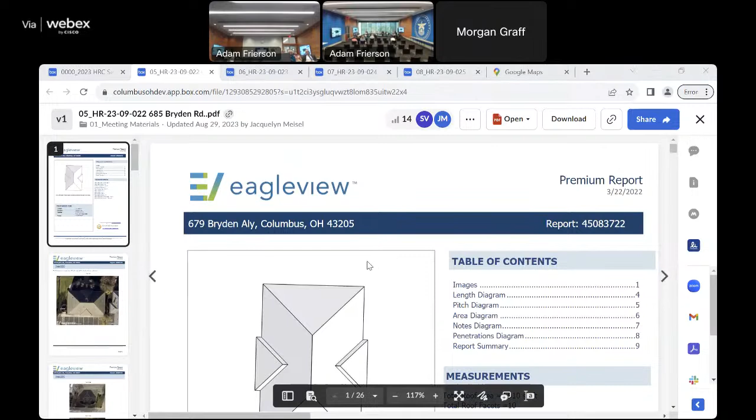This is a request for action, exterior alteration. The proposal is to replace asphalt shingles with CertainTeed Landmark Architectural Dimensional shingles in Noir Black. That shingle is not from the approved list, which is why the application is on the agenda. It would also include installing a gray metal ridge roll.

The application was previously on the November 2022 HRC agenda, but it was withdrawn by the applicant at that time, so the applicant has resubmitted. The building at 685 Bryden Road was approved as new construction in 1991. The construction drawings note the roofing material as 30-year asphalt shingles with 2 skylights on the west slope of the roof and 1 skylight on the north.

Based on review of building permits, it appears that the existing 3-tab shingle currently installed is likely the original shingle. The landmark shingles proposed are described by the manufacturer CertainTeed as designed to replicate the appearance of cedar-shake roofing. There are currently 5 different landmark designs, which are listed out in the staff report.

In historic districts, the commission focuses on what materials were originally used on buildings, and we try to maintain those original materials, or return to the original materials if the building has been modified over the years. So City Code 316.11, standards for alteration, requires that new materials match the original as closely as possible.

Previously, maybe not for this application but for the prior one, the applicant mentioned they weren't sure if some of the shingles on the approved list were available. So we checked in November of last year and also recently this month, just to make sure at least a few of them were available.

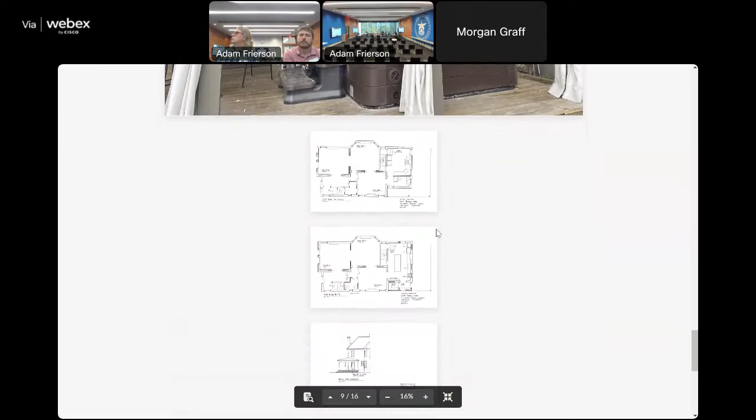A new window, aluminum wood, as well as a new door that would be a full light smooth fiberglass door with a transom. The new siding would be smooth cement board lap siding with smooth cement board trim. The proposal also includes replacing the existing back door with a new 4-panel smooth fiberglass door and replacing the existing window with a new full light door with a transom under the existing porch.

A full width rear porch was present historically by 1921, but this was removed by the 1990s. The current rear porch existing now was constructed sometime between 2016 and 2017, at least per the county auditor inventory. We're not able to find a record of it to confirm in our files.

At the September 7th business meeting, the commissioners asked for clarification about the site plan, noting that a section of the porch appeared to be left off. The commissioners requested a side-by-side view of the elevations and photos to clarify the proposed changes, and asked if the door opening that will be removed is an original door opening, noting that removal of the original door opening was the main concern.

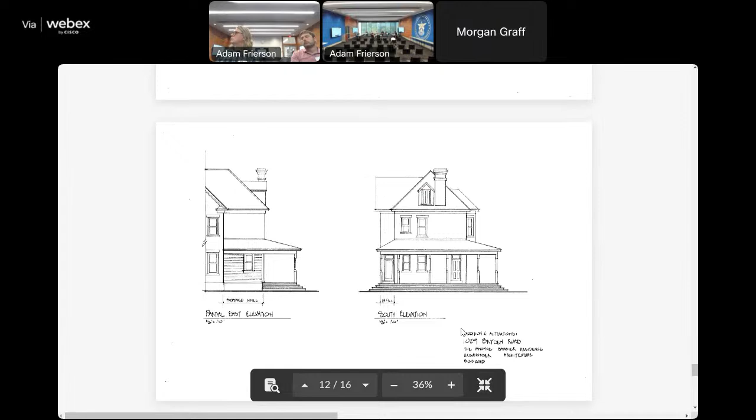In response to commission feedback, the applicant noted that the area of the porch where no changes were proposed was left off in order to better fit the area where changes are proposed. The applicant noted that photo 3 shows the west elevation, probably the best photo to compare, showing where the railing is, which is proposed to be a solid wall.

Photos 3 and 4 show the south elevation, and photo 6 shows the non-original door proposed to be replaced with a new 4-panel solid door. Photos 7 and 8 show an existing window over the hot tub, which would be replaced with a full light door and transom, like the east elevation.

The applicant also noted that the only change would be that they wouldn't be replacing the interior door opening, so they would be removing that access from the inside, and replacing the non-original door with a solid 4-panel door.

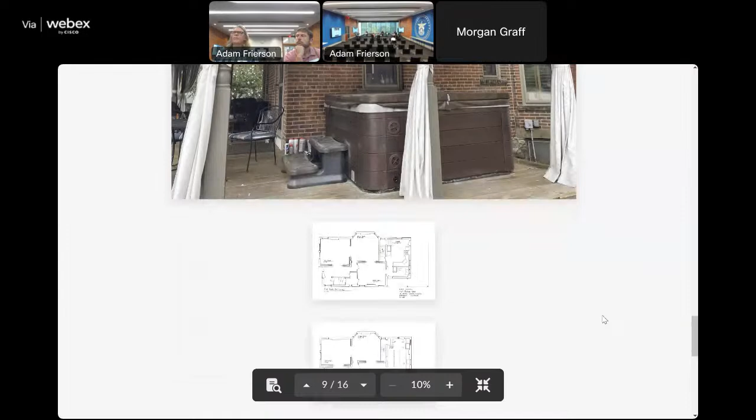This is a conceptual application, so the recommendation is that the commission should offer design feedback that can be utilized by the applicant to further refine the proposal for review at a future HRC meeting. No action is required. The basis for the staff recommendation are the standards for alteration, specifically numbers 1, 2, 10, and 12, as well as the standards for new construction under City Code 316.12.

I'll turn it back over to the commission. Thank you, does the applicant have anything they'd like to add? Basically what we want to do is create this mudroom and pantry and a new entrance. The idea would be that we build from the header down, put a new foundation in, and just enclose part of this non-original porch.

At the same time, we've got that Dutch door on the back that we would wall over from the inside and put a new 4-panel solid door on the outside. And we would like to add another door where that window is.

I think we have sort of 3 things to talk about and see how comfortable the commission is with those proposals. But the roof of the porch would all stay, it's the existing roof line. It's essentially just replacing from the gutter line down.

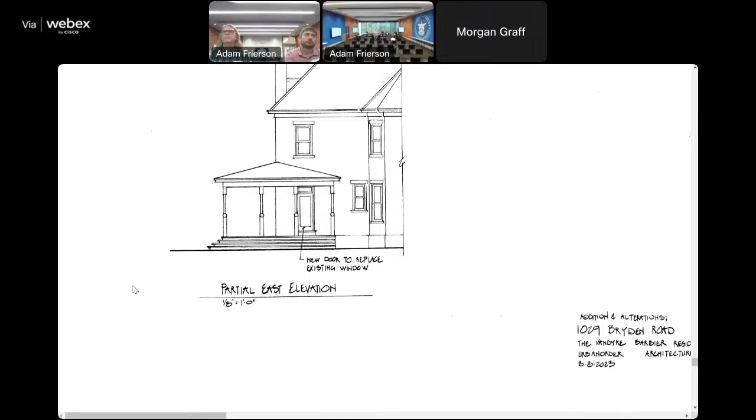Yeah, and for the east elevation, we would still have that header continuous along there.

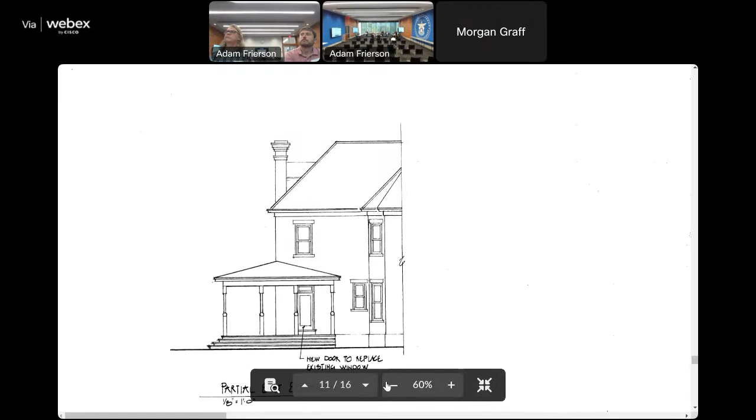I have my opinions, I don't know. I'm familiar with the district a lot. When I look at the side elevation of it, just go to that real quick. Don't scroll down yet. When I see the image on the left, that looks like so many sleeping porch little enclosures on Bryden Road, tacked into corners and kind of siding-filled little additions that they made along the streetway.

I'm not really offended by it as long as it's trimmed out and has the right detailing - trim board, headboard, base. It'll look like there's a bunch of sleeping porches or little built-on kits that exist in the Bryden Road corridor, often brick homes with these appendages clad with siding on the back. So to me, the architecture fits. It just is what it is.

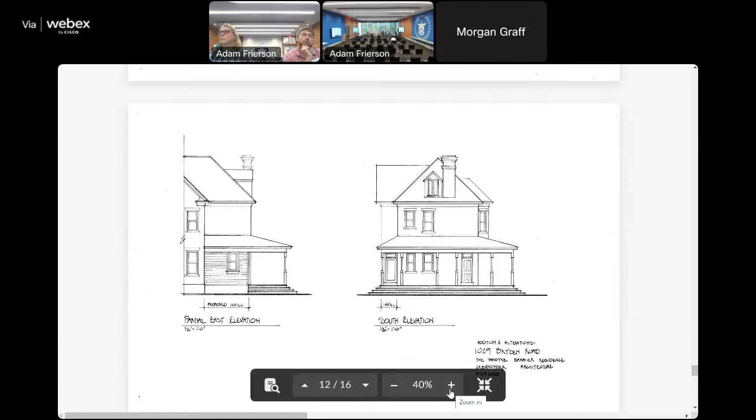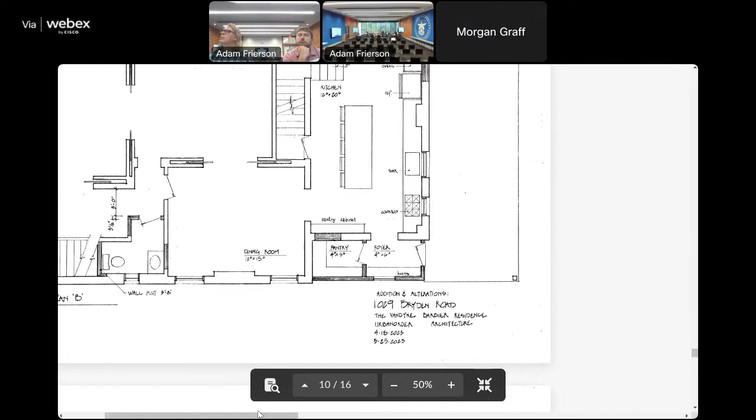That didn't seem like much of an issue during the business meeting. I think our primary concern is what's happening inside of that sleeping porch, and your proposal to remove or wall in an existing door and propose a new opening. I don't know if you had additional reasons why we would start to take apart that original fabric of the building in that way.

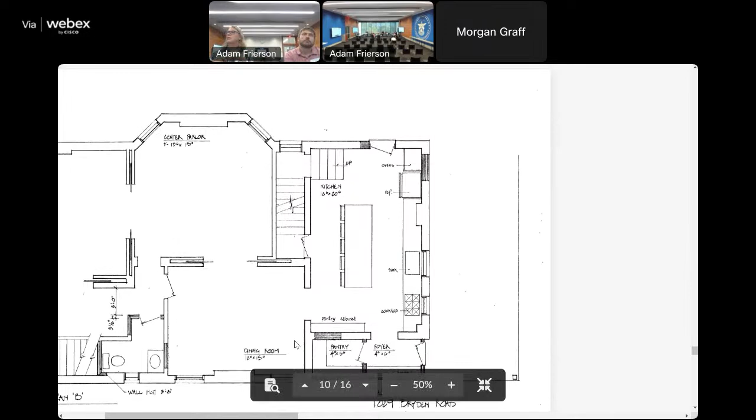Because the existing side door to the porch is now going to be interior, we would just put a frame wall in there so it's easily put back. Is that what your question is, from the interior door? I would like to see the whole floor plan. So are we talking about this original opening? Yeah, we would just frame that in and it would be on the interior.

We have to treat the building and this new sleeping porch as if at some point that could be removed. If that were to happen, we've now taken away some of the character of the existing conditions for that exterior wall. My concern is the additional opening - that's what's going to change. The new opening you're proposing, you're now taking away existing original brickwork from that wall.

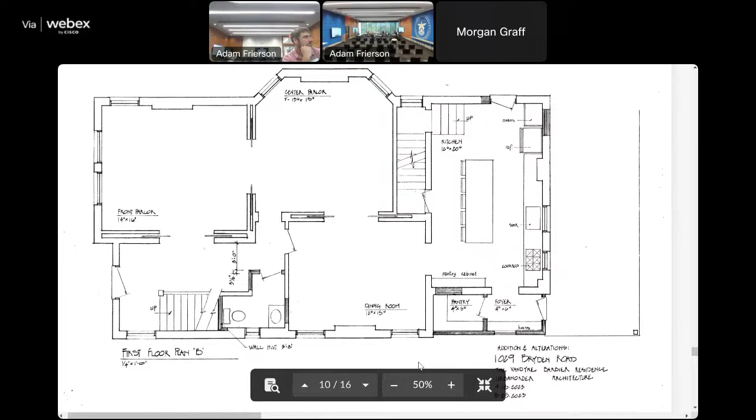Can you flip that around and use the original opening, or if we exhausted that, or it just doesn't work - I would rather walk into a foyer than a pantry. But historically, we've done many, many additions and modified exterior walls. That's considered little stuff. I look at the oodles of additions made to the German village homes, for example, that you couldn't peel those things back off.

If you could move it around and use the original opening, that would be fantastic. You say take the original door and move it over there? No, leave it - pull that half down, figure out... come in there instead of coming out of that straight corner.

While we're talking about that, is there a similar thing going on - the filling of the 4-panel door in the back of the house and walling over it? That's like when we've asked other applicants to do wall-overs, right? It's still a door on the outside. Is the other door, up top, is that a window? That's the one that's the hard part for me. I look at it on all of them.

I was saying if you gave a little on one, we could figure out the other way, but you see where this is going. I can have Clayton comment on this, but we're still debating whether we need that door.

If that is a trade-off to let this addition happen - what do you think, Lane? Because I think at some point we were going to potentially move the hot tub, since right now the hot tub is so close to that doorway, we were most likely going to primarily use that other egress and ingress point at the new area we're planning to build out.

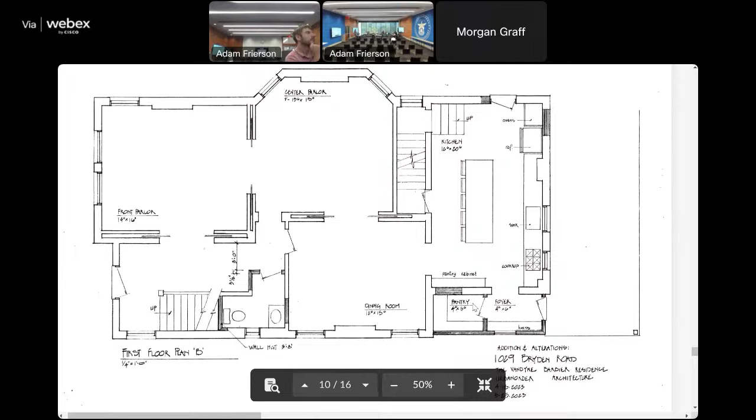The issue here is this porch is big and it wraps around, so I just wanted to have access so you didn't have to walk all the way around. Yeah, I see where you're going. Currently, if you look at the original plan, there's a ton of room - this is a solid wall.

So we're talking about over here too, right? Yeah, well that's where the addition would be. A picture of the elevation - so I have had this conversation with many other commissions. This is where we would propose a door, on the far side.

I've been doing this for a long time, and it surprised me that we're talking about modifications to the original fabric that is now going to be interior. Seems like a new thing, just having this conversation.

So the way it exists, here's the other thing - I don't think you could put a door in that opening. You're gonna have to go wider anyway. We would modify that, yes. How much wider from that standpoint? You wanna go 3.0 or how big can you go?

It's a lot of doors. You have a new door around the corner, you're gonna look at a 4-panel door that's an infill, then you're gonna have an addition with another new door. You've got a lot of doors on the back. To me, the lesser of the evils is the addition in the corner and not even touching this whole area, in some ways.

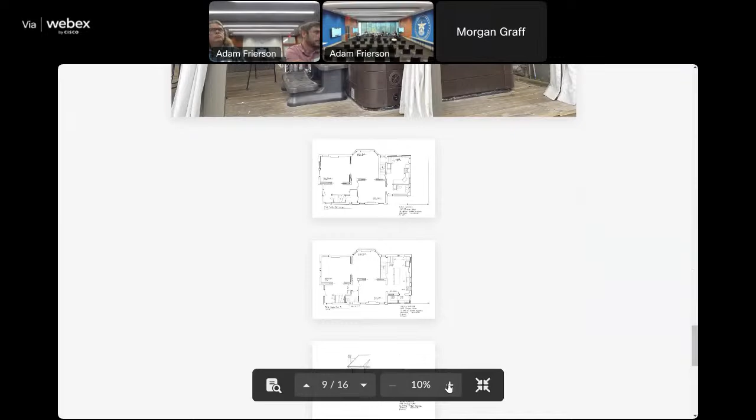How much heartburn do we really have over this interior door issue where we're removing and infilling that? I think that's no problem, that could be taken out. Yes, inside that porch. So now we're cutting a hole in there for a doorway that didn't exist.

So we're breaking this down into 3 application scenarios, and this is just an application for the addition. Let's start with that. I think I'd be okay with the porch addition, I don't think that's ever gonna go away. If it was easy to flip that pantry down you could go through that door, but it seems like it's gonna work a little better with the way they've designed it for a reason.

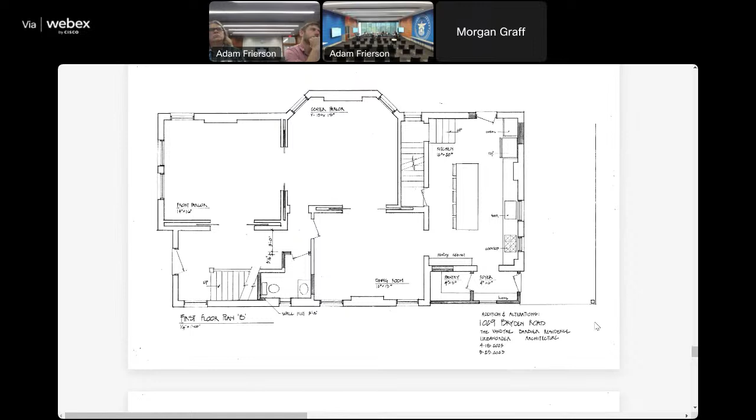I have a reasonable amount of support for that kind of modification, knowing it's basically at that point an interior wall. And this addition's gonna be there, I think. I don't think we're misrepresenting the historic nature of the building by converting something that wasn't there - exterior is becoming internal, which is very typical in historical buildings. It's kind of the American way, always doing little add-ons and add-ons. So I think I'm coming around to seeing it your way.

I know, Tamika, you might have a reservation though, right? Slightly, but I can compromise. Does it help if we make that the same size as a regular door, instead of the 4,6 or whatever it is? Right now it's like a 3.5 foot opening. I don't know how big you're gonna put that door on the outside, but if you want to slide a wheelchair through there, you might wanna keep some space. I'm just asking. Sure, no, I get it.

The other thing too, you might have the dimension on that. When you eyeball that up, you're at about a 2.8 opening, 32 inches or something like that, right? And if you take out the frame, you're at 2.4. It's getting to be tight. I think you're gonna want a larger door anyway.

And then you're getting into modifying brick, and I might have some reservation at that point, if we're talking about the door on Plan North. If we're modifying openings now and converting, for me that might be a whole different discussion. So I'm more Plan South, I could see getting on board with that, but Plan North converting the window to a door would be a harder sell for me.

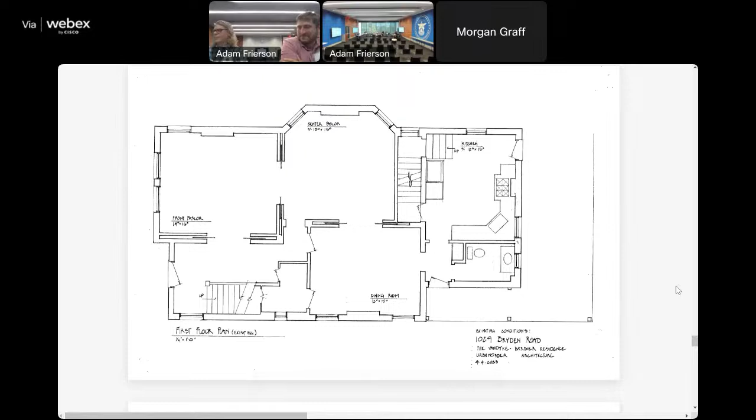Conceptual approvals and no action required. Okay, well, thank you. Yeah, I think I'm gonna appreciate it. All right, so we're working on the drawings. Okay, yeah. Clayton, you happy? Oh, yeah, yeah. Going on to. Thanks, guys.

I do. Wonderful. State your full name and association with the property. Noah Strickland. I'm the owner of the property. Wonderful. Welcome. Thank you, Jack.

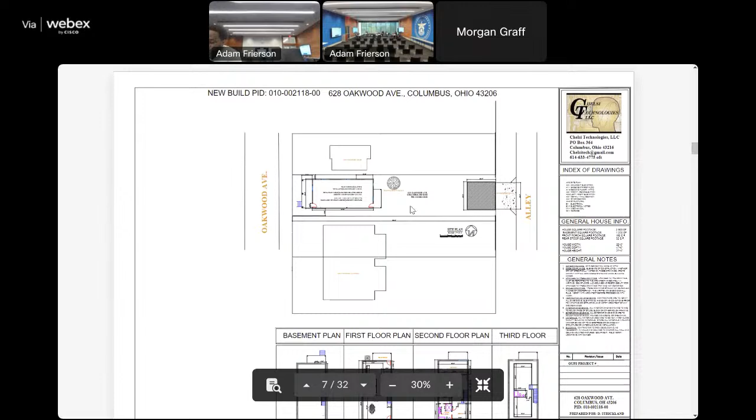Okay, this application is for 628 Oakwood Avenue. It is a conceptual application. The proposal is for a new single-family home, a 2,600 square foot, 2.5-story home, as well as a new garage, which would be at the east or rear of the property facing Walton Avenue, that alley area per the submitted materials. The site is currently a vacant lot. Historically, a 2-story brick single-family home was present on the lot, as well as a single-story wood frame automobile garage constructed sometime between the early 20s and early 50s.

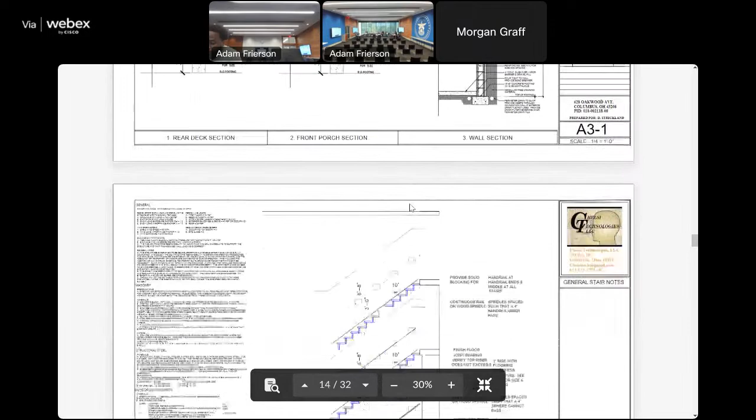In general, staff recommends avoiding the use of faux look materials such as the faux wood grain texture or stone veneer. Another ask would be, could additional windows be added at the side or rear elevations, noticing that there's not a whole lot of windows there. Also note that when returning for final approval, we recommend obtaining preliminary feedback from building and zoning to confirm whether any variances may be required, if any apply.

At the September 7th business meeting, the commissioners requested contextual drawings, or to-scale renderings, of the proposed home with neighboring homes to better evaluate consistency with the neighborhood. The commissioners noted that the site plan showed the house further forward than the other houses and wanted to be sure the setback was consistent. They also noted that they want to be sure the existing sloping lawn is maintained to keep the park-like setting and design of the neighborhood, and that we'll eventually need to see the landscaping plan as part of final approval.

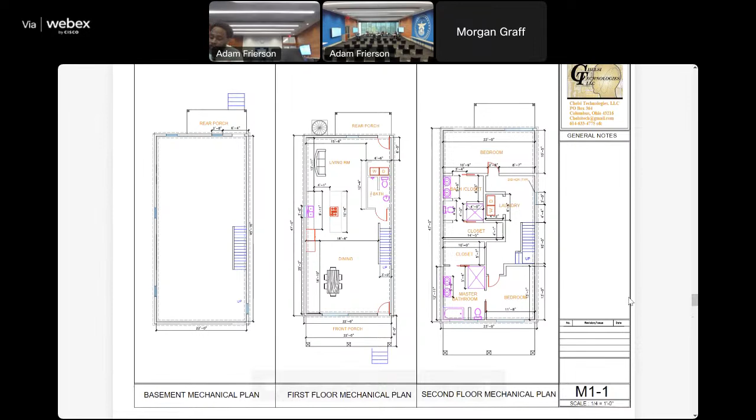The commission recommended avoiding faux materials such as the faux wood grain, and noted a preference for 2 garage doors to maintain historic proportions and consistency, unless there is documentation that the alley is too narrow for 2 garage doors. If the alley is too narrow, they recommend a single garage door be trimmed out to appear as 2 doors.

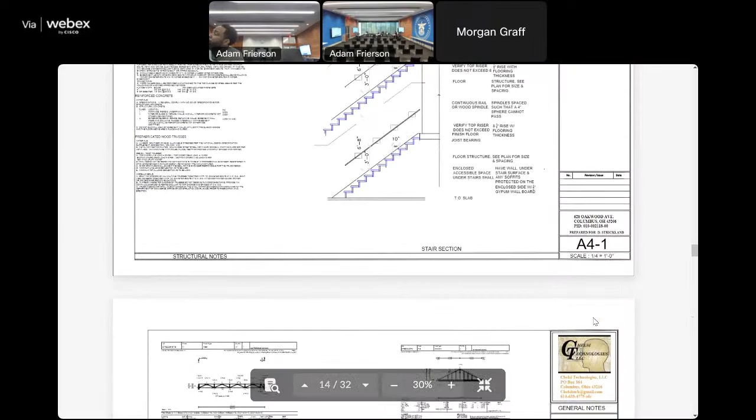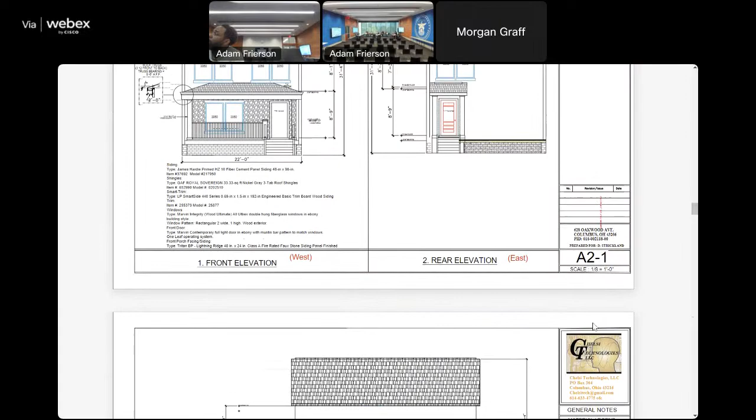In response to the business meeting feedback, the applicant has submitted revised drawings, including sheet A0-0, which addresses the setback consistency concern, sheet A0-1, which addresses the adjacent property proximity and scaling, and sheet G11, showing the front elevation of the garage, revising the single garage door entry to a double garage door entry. Since this is a conceptual application, the commissioners should offer design feedback that can be utilized by the applicant to further refine their proposal for review at a future HRC meeting, so no action is required.

In general, the staff recommendation is based on City Code 3116.12 standards for new construction, as well as the HRC guidelines for garages and outbuildings on page 85, and new construction on pages 90 to 93. I'll turn it over to the commission.

Thank you. Before going forward, what would the applicant like to add?

I just want to add that the composition of the exterior surface will be all siding. It had mentioned some veneer stone for the front facade under the porch, under the front porch, but we're just going to go with the siding for the entire width. So you're not going to use the stone cladding? No, you're just going to go full siding. Yes.

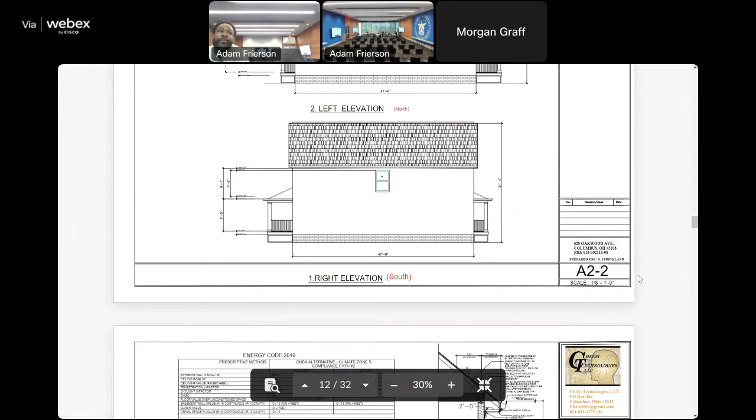Let me start off with positives. I can appreciate that on A0-0, you've aligned the front wall of the house with the neighboring building, so thank you for doing that. In that revision I'm looking at here, that's definitely a value.

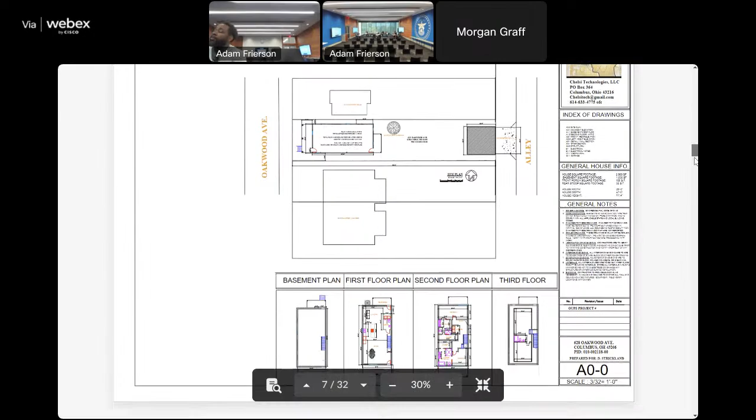This is the latest one, I think. Yeah, that's what I was looking at in my packet. Right, so I think that gets the critical piece of where the house needs to sit on the street. So thank you for doing that.

And I like the fact that it still fits there with that humongous existing tree, which you should look at in the photo in the back. It's still there - I mean, I know it looks like it's into the neighbor's yard or something, there's a fence that kind of cuts over there, but that's a big oak tree or something. Yeah, that's a nice big mature tree that gets to live. That's nice, you can't buy those, you know. That's one of those nice things.

For me, the general details of the house, it fits kind of contextually. It is what it is - it's a new build, it's got pairs of windows, upper and lower. To me it looks like some other homes I've seen on side streets around there that have kind of a stucco up top thing and brick from that point downward. It's got kind of some Tudory looking board and batten, panelization on that third floor. That's fine with me.

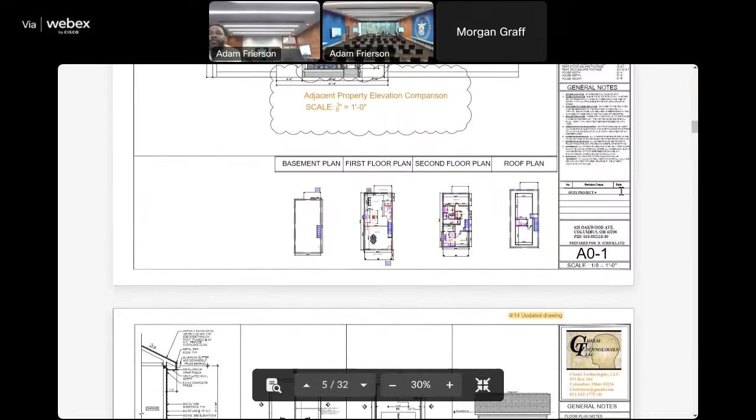I'm not so concerned about windows on the side, because looking at your floor plan, it's a modern house and that's not gonna be conducive to adding windows on the side. And this looks to be a rather narrow lot overall - it is. Yeah, although this elevation says there's 41 feet between the two structures, your property lines are not 41 feet apart, I assume they're much less. So by code you're gonna have all sorts of other issues with the property line coming down.

I mean you've got 3-3 on one side. That's cozy. Yeah, yeah. So did you have to get any variances? Not to this point, no. Okay.

I just assume the windows have mullions and some other things that we're really not looking at that are shown in this elevation. As you finalize your application, I'd love to see just windows plugged in here that truly show the jambs and scale, mullions that really give us that detail - show the door you're gonna use and show some of those things. Missing on here would be light fixtures as well - where are they? Where's the front porch light fixture, where's the side light fixture and rear window fixtures, that sort of thing.

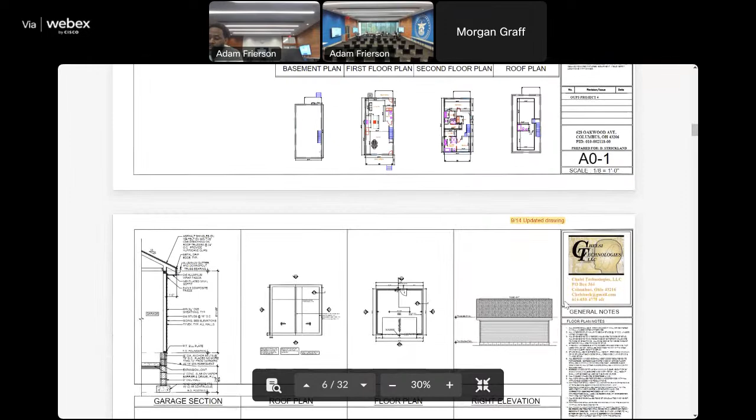I do agree with staff on the alleyway - the garage should be a 2-door, not a single door, unless you have a zoning issue with clearance and setback and width of alleyway. And that change, if you're gonna - I assume you've revised to this 2-door configuration? Is that correct? Yes. So that is your current proposal then? Correct. So I'm fine with that, with those 2 doors, it looks good.

The back elevation of the house has a little bit of an interesting appeal with those two windows kind of squeezed together underneath the door. It looks a little weird, but I get it - it's a narrow house. Yeah.

And again, you've got the great tree and you're gonna put a garage there too, so you're gonna block some of it. It's not gonna be a huge visible thing, there's just a lot of unusual space.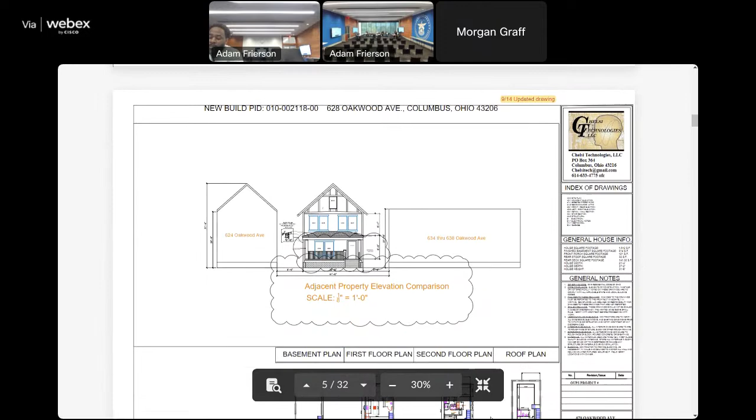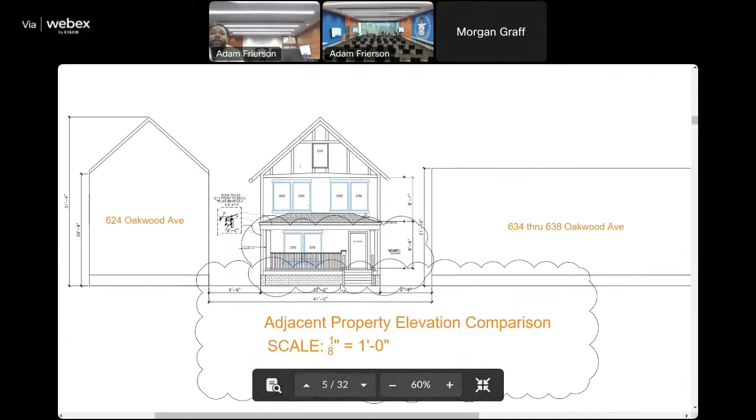I do have a question on the front facade, that upper block that says 2042 on the third floor - is that a window or a vent? Yes, that's a window. So that's the same numbers on the back, and there's a double hung on the back, I think.

So again, it'll help us to see the window schedule and what windows you're thinking, and all that good stuff. But it's really a nice packet.

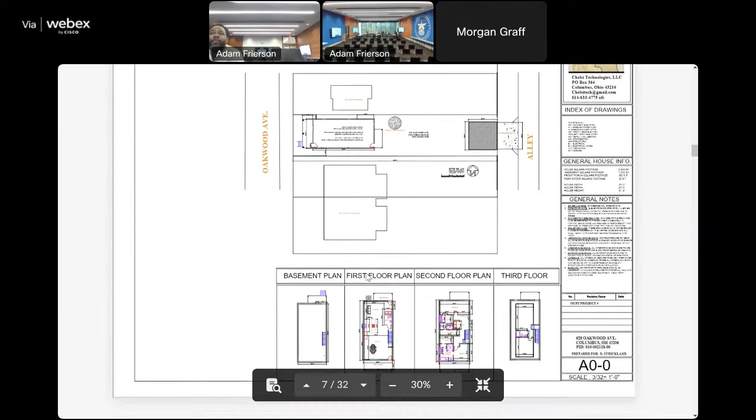It does a really good job. It's like a basic infill home to me, typical of what would have been just built by a contractor without an architect today.

Did you just come up with this design, or did you see some and think, hey, this is gonna work? Well, we basically just aligned with the neighborhood and what it called for, so we just kept it simple. It works.

I like windows, so I think that's a nice feature, curb appeal - that's why I like to add windows to the front and the back.

What do you think at the end of the day - you had made a comment about the windows in the back, and we also wanted to add windows on the first floor on the side. So I'm just mentioning why we want to.

Okay, 'cause that's just your final - I think we're all receptive to adding windows, yeah, it's a new build, which is lovely, as long as it's in keeping and respecting the neighborhood, which clearly it is, and you're working within a narrow footprint, so there's a lot of understanding of that as well. I think you're coming really strong right off the bat, very pleased with it so far.

Thank you. I think it's key when you come in - you've got some handrail details, there too, make sure you have gutter and downspout details as well.

Finishes all picked out, all the fixtures - there's only one I think that's pointed out in the garage, which is kind of a motion light, usually not the most appropriate thing, but we can get through that. These are just little details - we'll probably use like leaning towards the gooseneck, just black fixtures.

Bring in cut sheets, put cut sheets in your packet - if your manufacturer has a sheet that says this is the kind of light, the size, and all that stuff. Okay, product spec sheet.

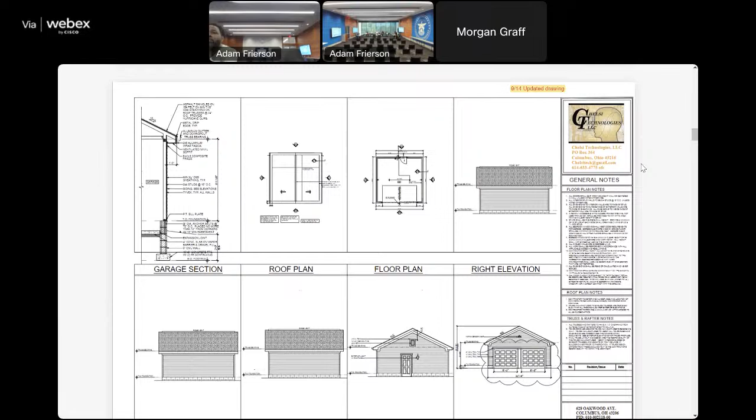And we're gonna get through some of those details with staff, but it's really on point, it's really coming along. So yeah, for the corners we'll use smart trim - for all the trim we'll use smart trim.

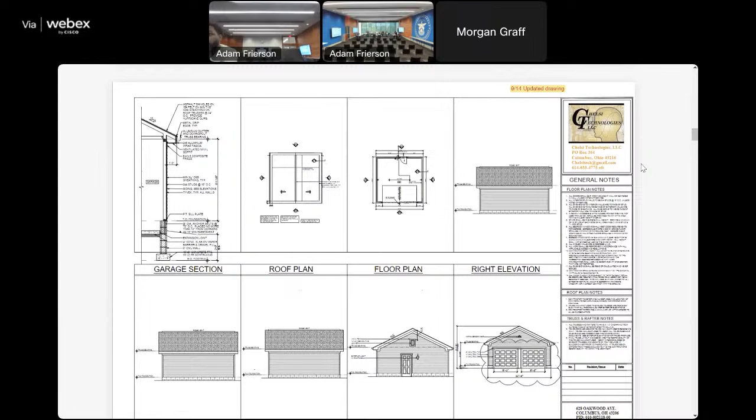So regarding the corners in the district, staff can provide you with examples of this. We do have a detail that has been used in the district where we request that you use corners of wood, not vinyl sided corners. Like smart trim? It's wood.

Smart trim is a synthetic product, right? Yes. So unless you're going to request a variance, you'll have to disclose that in full, because the corners we'd expect to see in most garages and even on the houses would be trimmed out in cedar or even Hardie. We've done that, Hardie. So that's going to have to be clear on the detail in your plan. Some of that really comes into effect with the depth of the product, and when you do the reveal and the cap for your siding, everything lines up nicely and works well.

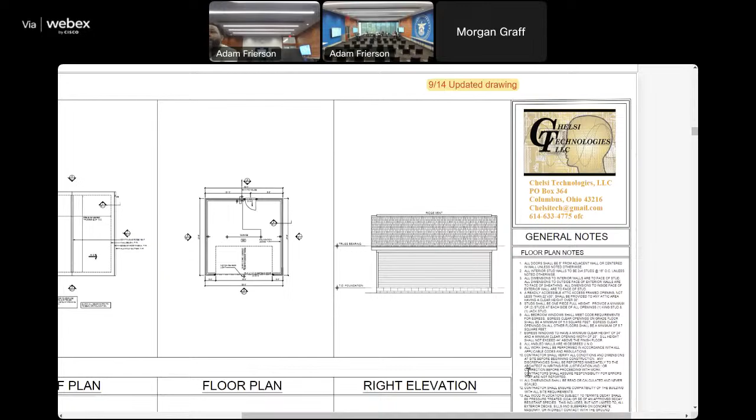And faux wood grain products are a no. Some people think it's helping, but it doesn't, it just doesn't look real.

When we're looking at the elevations, the plain white sections that don't have any texture on them, what is that all intended to be? Is that all Hardie? What kind, is that a Hardie lap? Yes, it's a Hardie lap. That's on the north and south elevations, on the side of the house.

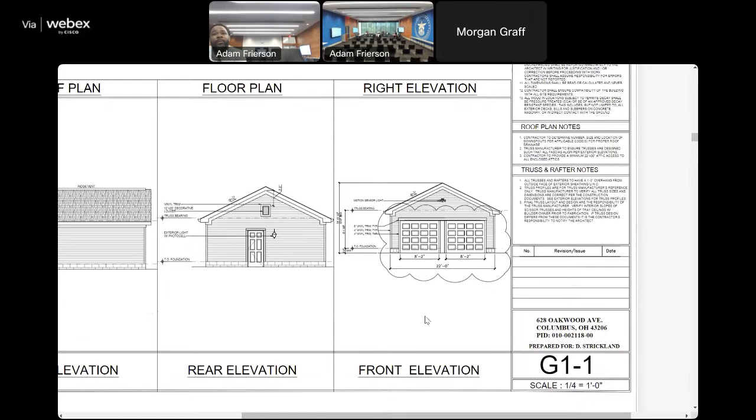Yeah, because it's solid. On the side of the house and also on the rear, the entire home will be Hardie lap. Outside of the third floor would be like a board and batten.

I'd ask your architect to actually show some texture of how that would look, and maybe some detailing about how it would be trimmed out, so we could provide more comment on the actual look and feel of the elevation, including the windows being trimmed out. This is fine for conceptual, but for the next step we'll probably want a little bit more detail.

Excellent, and for a conceptual package this is amazing, so you're on the right track. I'd echo that the front elevation really gets a scale, the way you've been consistent with looking at the adjacent buildings - heights, setbacks, and all that.

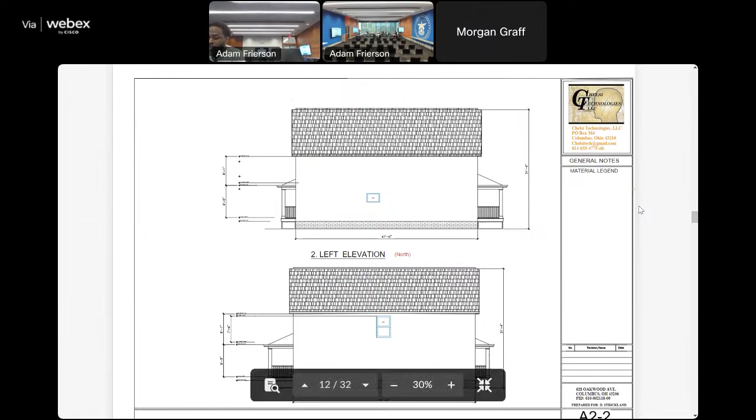Personally, and maybe this is a little outside of the commissioner role, but I'd implore you to consider the windows a little more. I think this is going great, but it seems a little sparse, the sides seem a little sparse. Ultimately I could be convinced it's not needed, but from your own experience on the interior, you might like a little more light and view as you're walking through that space.

Yeah, I wouldn't mind more light. More windows - hypothetically if you lived there, you'd want more light. Yes, for sure. So we're going to add more windows. I think the architect wasn't sure if he was able to for the conceptual drawings, that's why they're kind of incomplete right now.

So we would add probably another two windows on the top and then another window. Great, okay perfect. Yeah, that's the way I was reading it, it seemed a little incomplete, like they'd spent a lot of time on this elevation and maybe just weren't complete yet.

The other thing I thought, once we got talking a little more, was that because of the density, maybe there's less windows for that, because you're going to look out of one room and look right into the neighbor's place. So I was trying to figure out where that balance is.

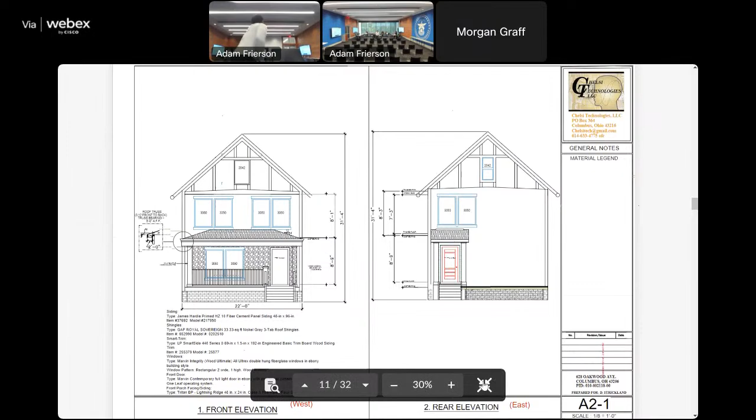All right, should we go ahead and continue that one? Or is it just conceptual review? Oh, the one from earlier, skip. Oh yes, we skipped, sorry. That would be 721 Wilson Avenue. Is that correct? Yes. I make a motion to continue HRF.

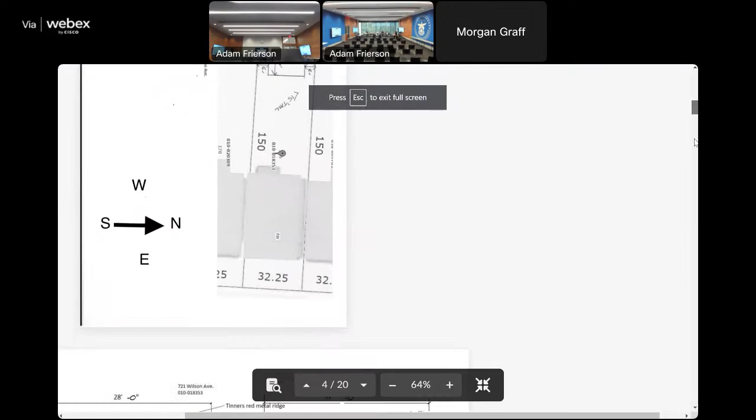Before we do that, do you want to go over what it is real quick? Sure. So 721 Wilson Avenue, the garage component that the applicant came in for was moved to staff approval at the business meeting. Now staff did notice that there are areas of stone that have been repainted white, and some small areas where the paint had worn off that were also repainted. So this was included as part of the application. We have not gotten a response. We've communicated with the owners so they know the options the commission discussed at the business meeting, which was: since this was mostly previously painted, the commission would be okay with repainting a color to match the original stone, or removing the paint if the applicant so chose. So I haven't gotten a confirmation from that yet, but that is the remaining component of the application on the agenda today.

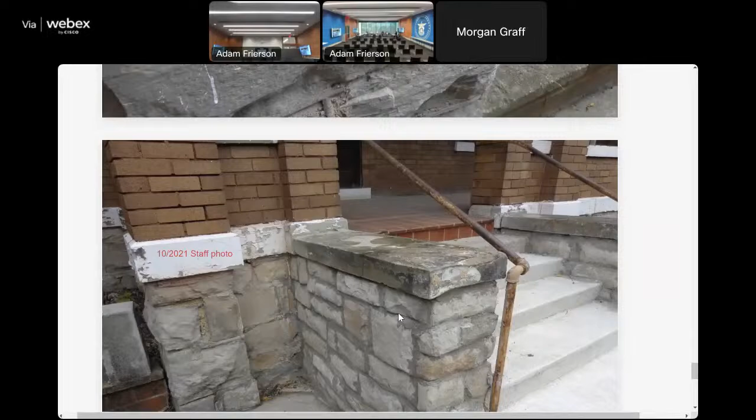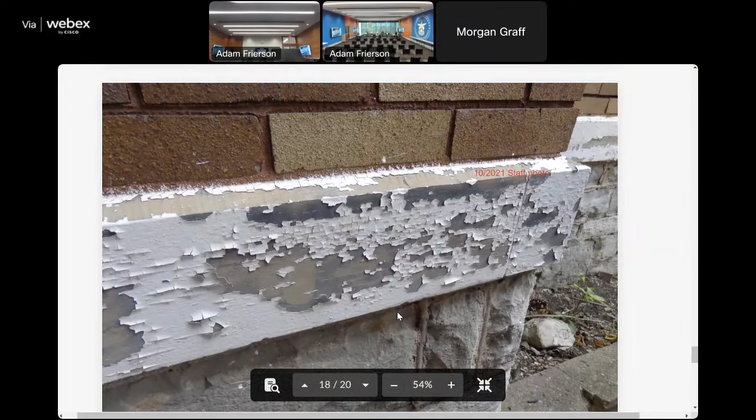So basically, the moral of the story is they scraped this and repainted it already. Some of it. Yes, and it might not necessarily have been the current owner, but it was recently done. So there was that issue, and then the fence, I guess. I feel like on this case, because we have proof that this was a white painted section by a previous condition, I'd be worried they do more harm trying to get the white paint back off again now that it's been painted. And maybe if any approval is granted, it's just on the condition that it can exist until it's ready to come off again. Because the paint was temporary, is that really what went down on this?

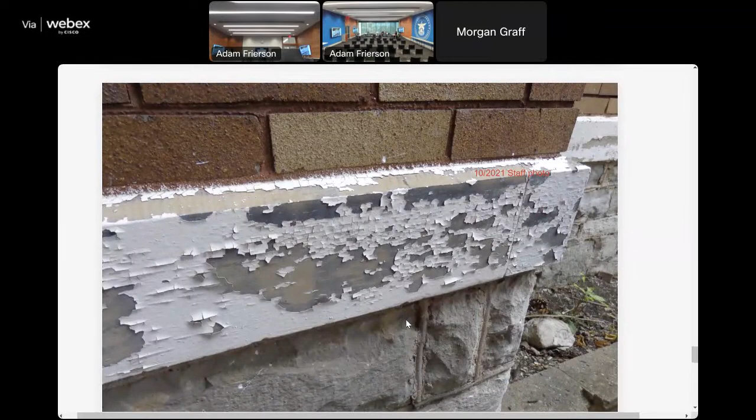Sure, all right. So for HRF 23-09-023B, 721 Wilson Avenue, we are making an approval of keeping the paint as it is, with the condition that once it is ready to be removed, or once that paint begins to wear down, all of the paint below the trim would be removed. I'll second it, but if you don't mind I'd add something: that we're only allowing that to happen where there is pre-existing white paint only, and that paint can be painted over if it's peeling in only those areas. Is that okay? I'll re-second. Okay, motion and second, any further discussion? All those in favor say aye. Aye. Opposed, abstention, motion passes.